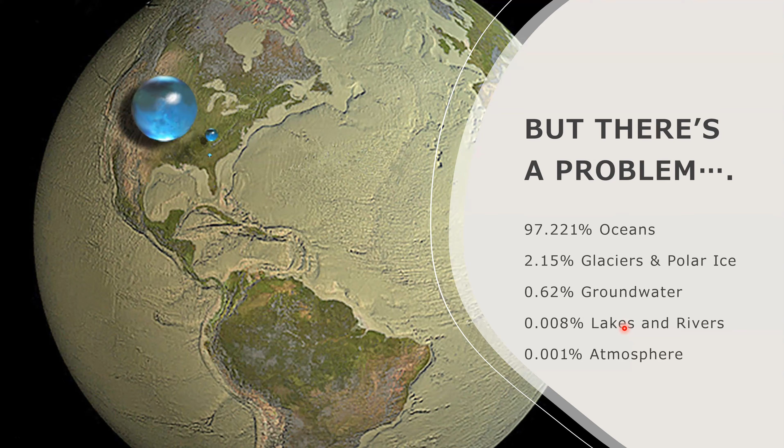So that 1% that we can use of surface water and groundwater, we use it for everything: drinking water, agriculture, transportation, steam power, and a lot of other things. So we have 1% of potable water on Earth that we can use.

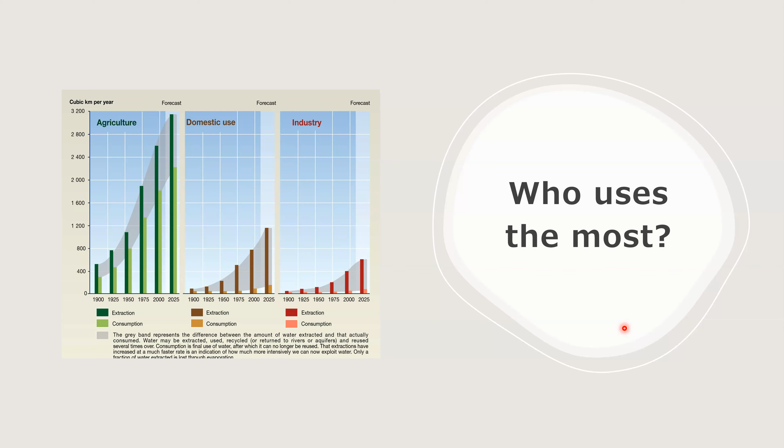So who uses the most? This is a little different than some of the other pollutants we've talked about. When we're talking about petroleum consumption, industry uses a lot more, but as far as water consumption goes, agriculture uses the most, industry uses the least, and domestic household use is right in the middle.

Looking at it a little differently, about 60% of the water usage on Earth is agricultural related, 25% is in the home or domestic use, and 15% is used in industry.

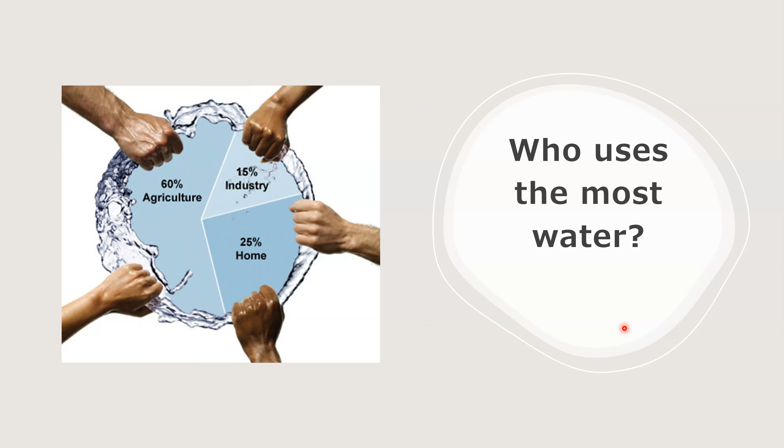Or you can do the meet the parents method, where they only flush it if it's number 2. If it's yellow, let it mellow. If it's brown, flush it down. That helps use less water. It's not super sanitary, but it uses less water.

Baths and showers are about 35% of your consumption in the home. If you take fewer baths or shorter showers, this will decrease for you. Laundry uses about 20%, so filling up your entire drum washer, and then all of that after it finishes washing the clothes will get pushed out into wastewater. Then 10% is drinking and cooking, and 5% cleaning. All of these can change depending on your habits in your home, but this is typical.

You are lucky though, because you can turn on your faucet in your home and clean water will come out. But a lot of people in a lot of parts of the world lack access to potable water. Potable water is water that is drinkable without having to change it at all.

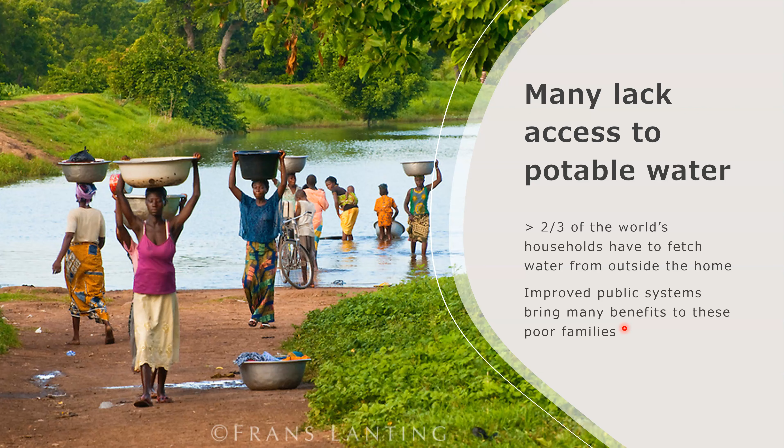So 2/3 of the world's households have to fetch water from outside the home, walking to a stream to get water. Improved public systems bring many benefits to these poor families, and there has been an increase in potable water access in some of these countries, but it's still not as great as if you live in California and can turn on the faucet and get clean drinking water.

This is similar to what's happening in Kazakhstan and Uzbekistan. This is the Aral Sea from 1977 to 2010. From 1977 to 2010, there has been a drastic depletion of this surface water body.

One of the things you'll notice is as more water is pulled out, you'll see these white areas develop. That is all of the excess salt left behind after water is extracted, and we call these evaporites - the product of the evaporation process, what's left behind. It's usually a very high salt content, and eventually this will be undrinkable because there's too much salt in whatever's there now.

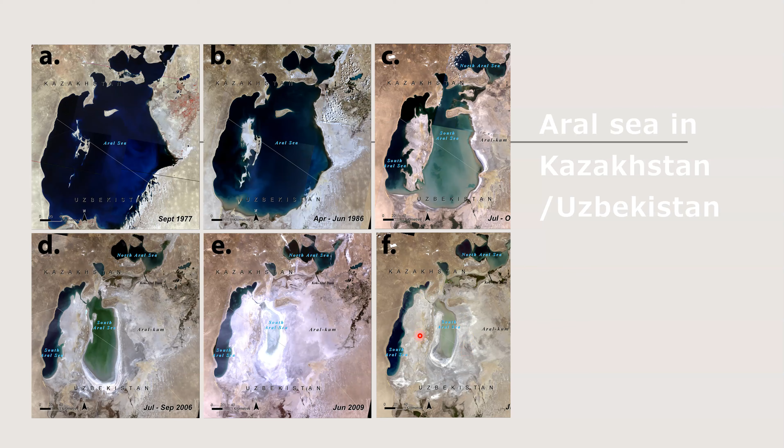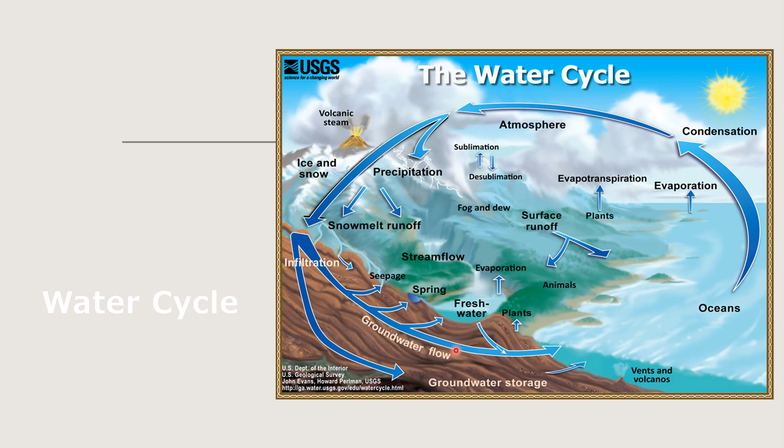The water cycle is important. We need it to live. One issue is that water can get trapped in specific areas. Right now we have a lot of water trapped in the ocean, and without evaporation of the ocean surface, we won't get condensation and then precipitation, which is where we can get water. We can get water from runoff into our surface waters, or infiltration into groundwater, which we can then extract. But if that flows back into the ocean, we won't necessarily be able to use it.

Surface water is any water that is precipitated onto the ground and is not absorbed into the ground, and will run off as fresh water storage. So surface water is water on the surface, like streams, rivers, lakes, things like that. And we can drink from these water sources.

But oftentimes we have to clean them. We have things like surface water treatment plants that help clean out any pollutants that might be in the water before we send them to the distribution system to come into your sink.

Surface water, infiltration, and runoff: when precipitation occurs, the water will either infiltrate or run off. If it runs off, it becomes part of the surface water system, as a stream, a river, or something like that, and then can flow into the ocean. Or it can infiltrate or percolate into the ground and become groundwater, which usually stays in the ground for a significant amount of time before it's pumped out and used.

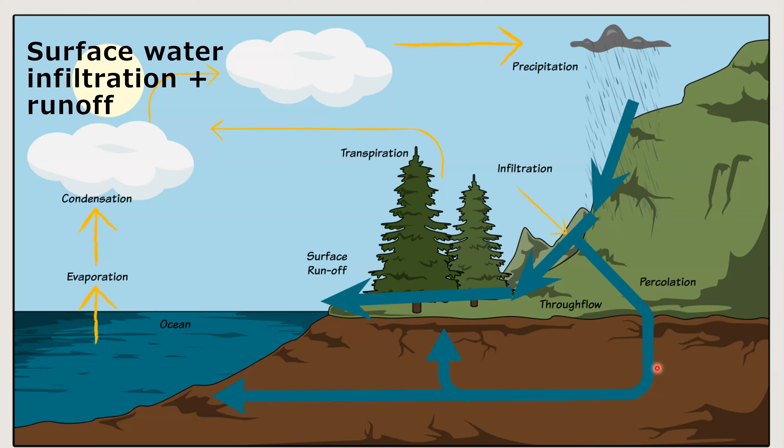Water runoff includes rivers, lakes, small streams and creeks, storm drainage, flooding. Urban surface water runoff happens when it hits the street, then goes into our storm drains, and in the Central Valley in particular, into our flood basins. You've probably noticed big basins that hold water around town. Those are fed by the storm drains you see on the side of sidewalks and streets that collect any rainwater.

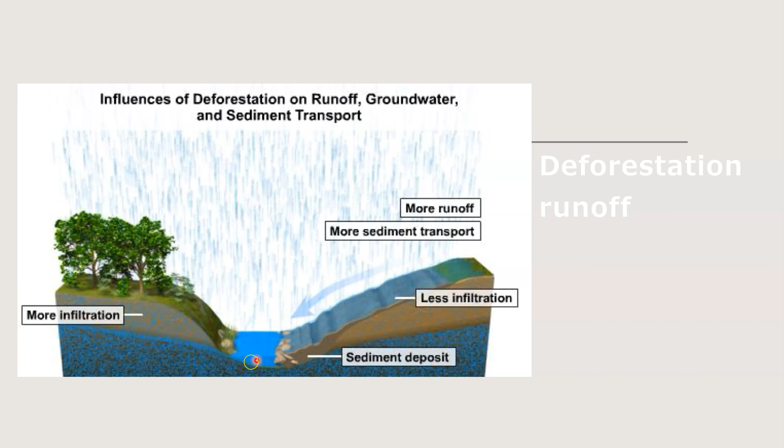Deforestation increases runoff and decreases infiltration. The more plants and trees you have, the better your infiltration will be into the groundwater, and that's really where you want most of your water to go, because the ground has a great natural filtration system built in. Whereas as soon as water hits the ground, if it starts running off, it has more chance to pick up ground pollutants on its way. So the more deforestation in an area, the less infiltration and more surface water runoff you'll see, which will also increase surface water pollution.

Things that influence water infiltration are precipitation, the base flow you already have on the surface, soil characteristics, soil saturation—if the ground is already saturated, more water can't fit in—land cover, such as whether you have deforested lands or large vegetation in the area, the slope, since the steeper the slope, the more likely water is to run off instead of percolate or infiltrate, and the evapotranspiration.

Water infiltration can be affected by porosity and permeability. The subsurface materials below the surface will either have a high porosity or a low porosity. Porosity is the volume of open spaces in a rock or soil. If we have a high porosity, water can fit into the pore spaces between the grains or between the rock or soil very well. This can be pore spaces, fractures or joints, vesicles, cavities—any opening in the rock or soil is considered porosity. Permeability is a measure of the material's ability to transmit that water.

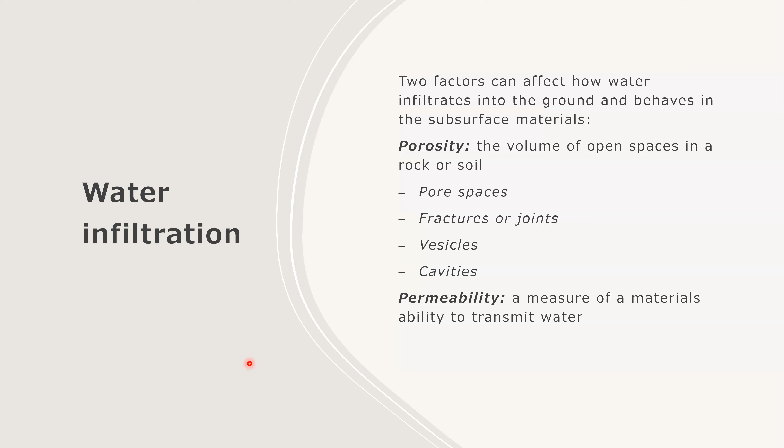If it has a high porosity, it'll often have a high permeability, so these go hand in hand. Permeability is the ability to transport water, and porosity is the open spaces. We want the subsurface to have a high permeability so that water can infiltrate. Things that have a low permeability will not allow water to come in.

So here's an example of what permeability would look like in different types of materials. Here we have gravel, sand, silt, and clay. Clay is a very small sediment size, and it will take upwards of 200 years for the same amount of water to flow through the same amount of material versus gravel, which would take 2 minutes. So depending on the subsurface material, if you have a lot of clay, you'll see water pool at the surface more so than infiltrate.

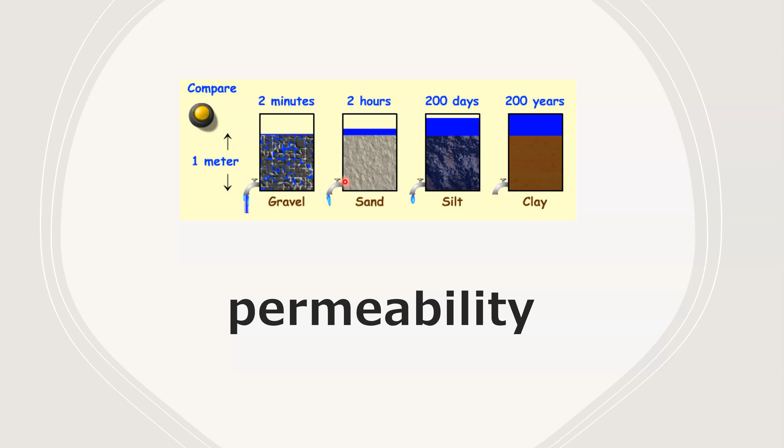So in places like Tulare, that used to be a giant lake basin which had a lot of clay. There's still a lot of clay in Tulare, and they have poor infiltration into their ground. When we have surface water, you see a lot more pooling out there. Whereas in Reedley, they have a lot more sand and gravels because they're near Kings River and near the mountains. So their infiltration is greater in Reedley than you would see in Tulare.

So here's a look at porosity. Porosity, like I said, is the pore space between the grains. Depending on whether you have all of the same size, different sizes, or maybe some cement holding some of the grains together, that will increase or decrease the porosity. So if you have a bunch of marbles in a jar, for instance, the porosity would be higher than if you had those same marbles plus sand in the jar.

So some porosity factors are rounding, sorting, and cementation. Rounding is how round the grains are. If the grains are very well rounded, you're going to fit more water in those pore spaces, you're going to have more pore spaces, higher porosity. If it's poorly rounded, so it's angular, the grains will fit together more like a puzzle piece, and then the water, as it infiltrates into the ground, doesn't have as many spaces to fill.

So it would be a lower porosity if they are poorly rounded. Now, sorting is the sizes that I was talking about. If you have all marbles, there's a lot more spaces between the grains because they don't fit together like a puzzle piece. But if you have two different sizes, marbles and sand, the sand will fit between the pore spaces in the marble, and then less water can fit in. So if you have poorly sorted material, a bunch of different sizes of grains, you're going to see less porosity, a lower porosity material. If they're well sorted, all about the same size, you're going to see a higher porosity.

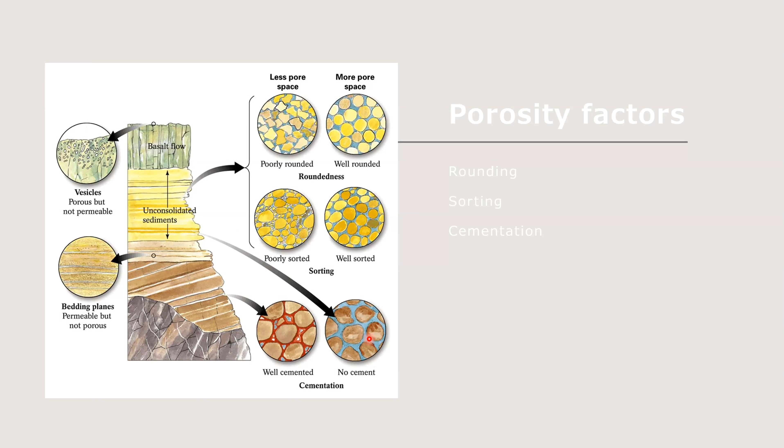All right, so this is an example of permeable pavement. One of the issues in urban surface water runoff is that a lot of the surfaces that we create are not permeable. So asphalt, concrete, these things do not allow water to permeate through them and then go into the ground below them. So there's something called permeable pavement that has been developed.

And you see this a lot in San Diego. You'll see it in some parts of LA. They have it in Santa Barbara. Sacramento's starting to do it, so that the water percolates through this pavement and doesn't get stuck on the surface and clog up our drains. So the speed test is pretty interesting to watch. Hopefully it'll work.

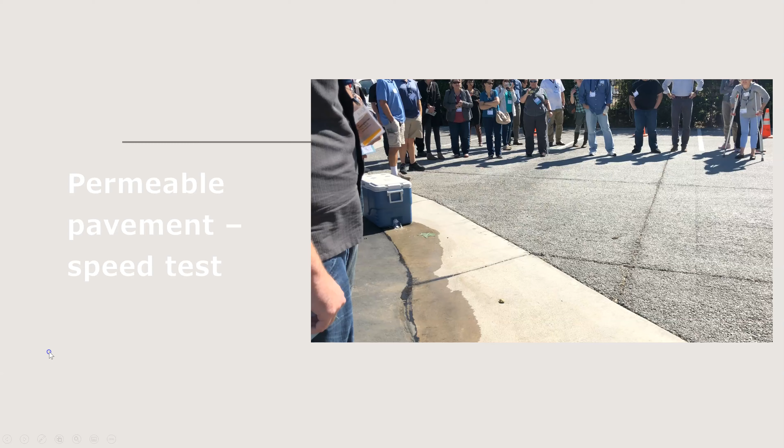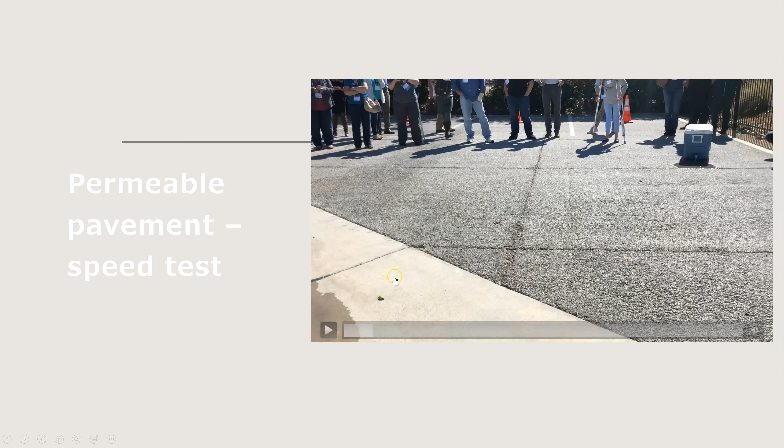There we go. Okay, so one second real quick. This ice chest is filled with water, and this ice chest is filled with water. One is on the drain, which is impermeable concrete. This one on the right here is on the permeable pavement.

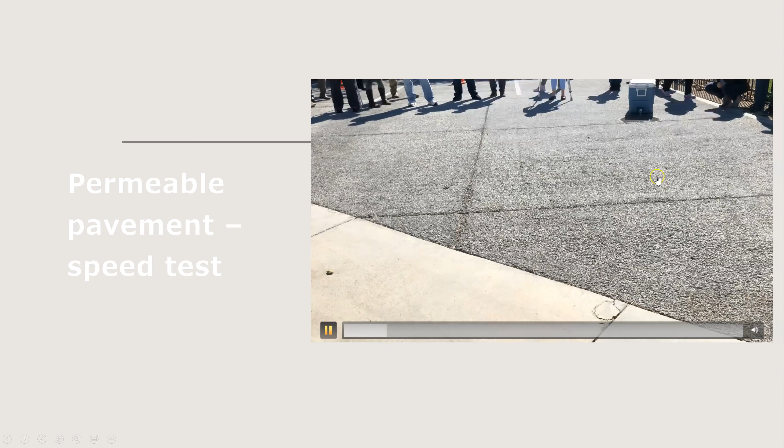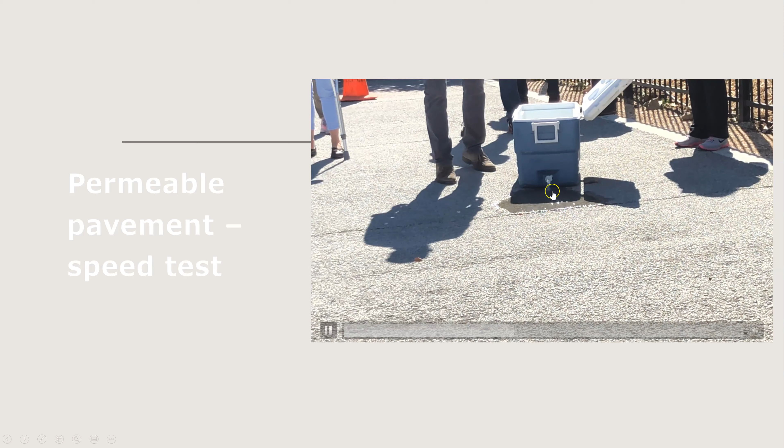Okay, and you can kind of see what's happening. So water is flowing down this impermeable concrete, and the water is flowing into the permeable pavement. The water here is allowed to percolate into the ground beneath the pavement, whereas this other one here just flows into the storm drain and is now backing up the storm drain here, as you can see.

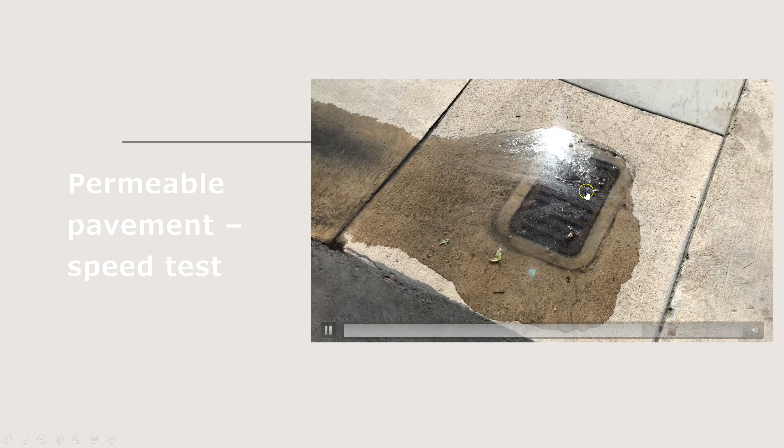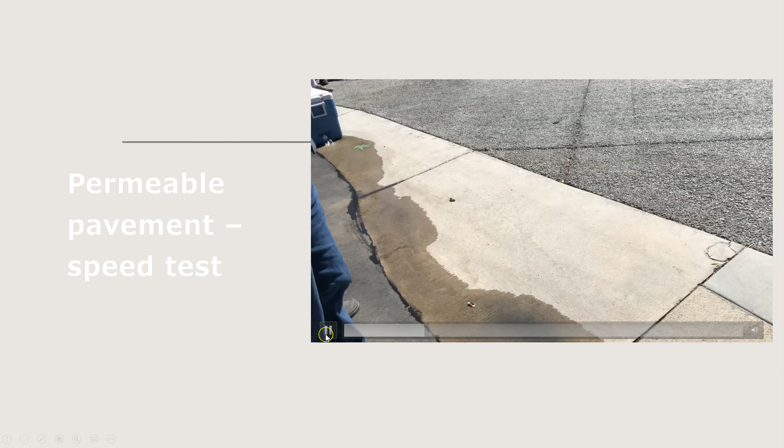And so this causes a lot more issues with runoff, right? So if we have more permeable pavement like this, then we would see more infiltration into the ground in urban areas. Here's another look at it. This is in a parking lot.

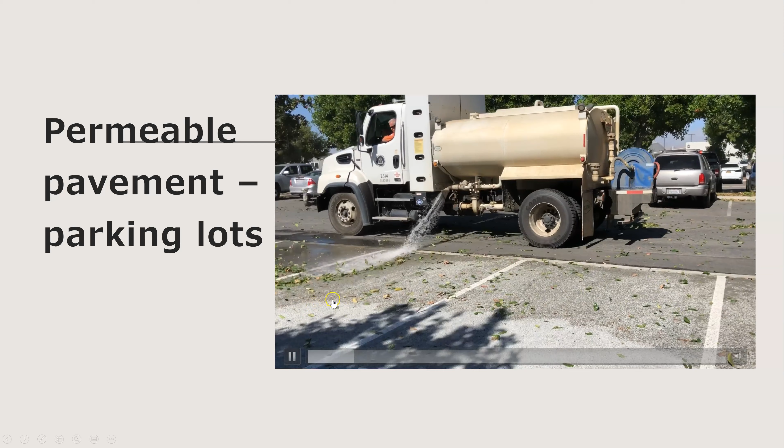Water starts spraying a significant amount onto the ground, and it's not even coming up halfway into the driveway space. So the water is percolating really well into the pavement and then going into the ground.

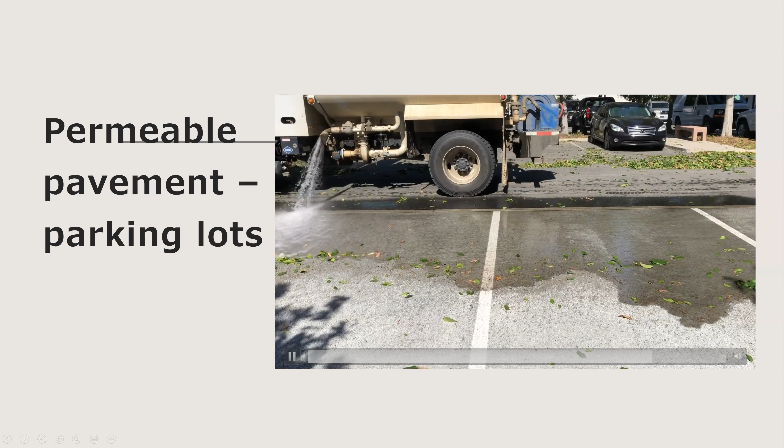Now, one of the issues when we were talking to the people who developed it, on this little field trip, is that these holes will get filled with dirt, debris, and leaves. So they do have to do more maintenance, cleaning it out and sucking out the dirty stuff so the water can still percolate through. But this is a really good development.

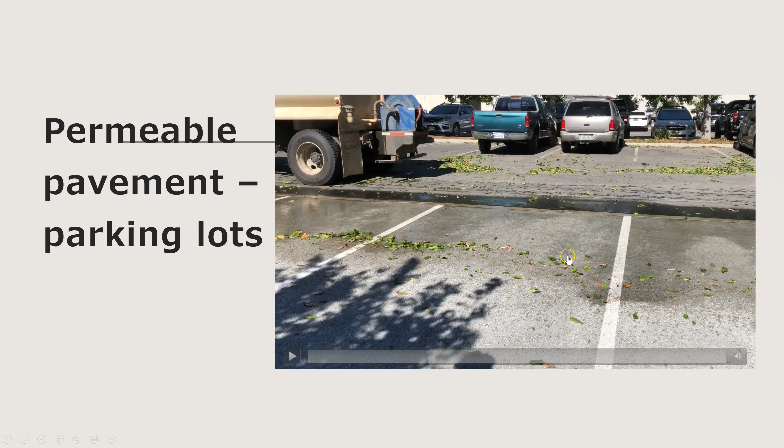Instead of water running off, it can now percolate into the ground. You'll see less surface water storage, but you will see an increase in our groundwater levels.

All right, so let's look at groundwater. This is what happens when the water hits the surface and percolates into the ground. We then focus on groundwater, which is really important when we're talking about drinking water and how water works in the Central Valley.

So after infiltration occurs, there are a few different zones that the water can sit in. The first zone it would encounter is the zone of aeration, the area above the water table where openings in the material are filled with air and water. This is where water is transported from the surface all the way down into the groundwater.

The capillary fringe is a narrow zone just above the water table where water is pulled upward. Just like anything in nature, water wants to go from an area of high pressure to lower pressure. As it approaches the groundwater from gravity pulling it down, the water tries to go the other way, climbing back upward in this narrow zone, but eventually gravity is stronger than that threshold and pulls it back down to the water table.

The water table marks the top of the saturated zone, the bottommost zone in groundwater, known as the zone of saturation. This is a zone where all openings between spaces and grains are filled with water. Any pore space you see between grains is filled with water.

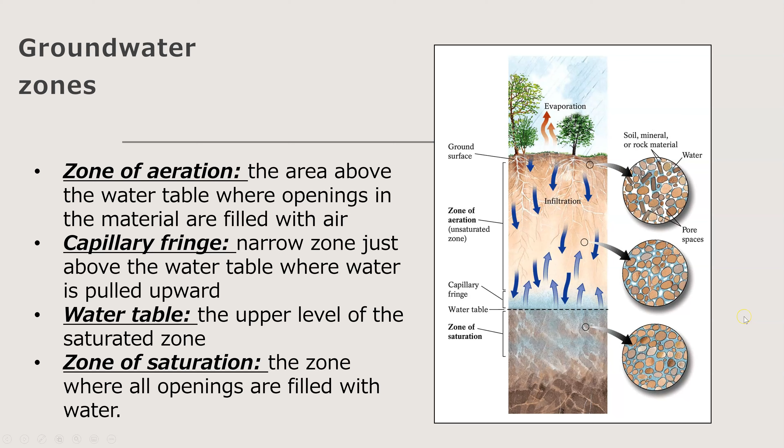The water that reaches the groundwater can be stored for hundreds of years in aquifers if it's not pumped out by people. An aquifer is a permeable rock or sediment that transmits water in a quantity great enough to be of use. So just a 5-gallon section of water is not considered an aquifer—it has to be over a vast area.

In Fresno, we have something called the Fresno Aquifer, which sits below the area of Fresno. So we have confined aquifers, unconfined aquifers, and then flow between aquifers.

Confined aquifers are overlain by a confining layer, an impermeable layer. Here we have a confined aquifer at the bottom, and a confining layer preventing flow between this confined aquifer and the unconfined aquifer above. Then we have the unconfined aquifer, where the water table is the top.

These upside down triangles represent the symbol of the water table, just an FYI. So the water table is here, where this blue line interacts with the yellow—this is the unconfined aquifer, where water will percolate down and become part of the aquifer.

Aquitards will retard flow between two aquifers, and aquicludes will exclude flow between aquifers. So this confining layer could either be an aquitard or an aquiclude, depending on its permeability properties. If it has intermediate permeability, it might just be an aquitard, slowing the flow. If it's more like clay, it's considered an aquiclude, which excludes flow between aquifers.

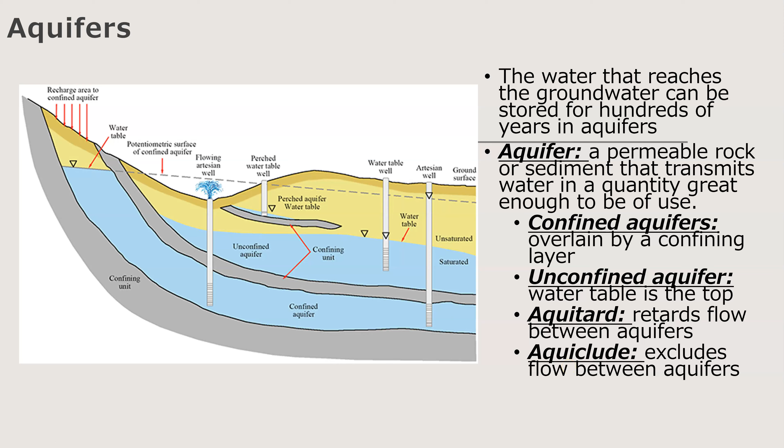When we talk about groundwater interactions, there's something on the coast of California that happens a lot: saltwater intrusion. This is when pumping of fresh water out of a well exceeds the recharge rate—you're pumping faster than the water can be replenished. This happens in a lot of coastal areas, and saltwater or seawater will infiltrate into your well. As soon as you see saltwater intrusion into your well, you've lost that well.

You then have to re-drill the well with more fresh water and try to create a barrier to prevent more salt water from coming into your new well, because you can't drink salt water.

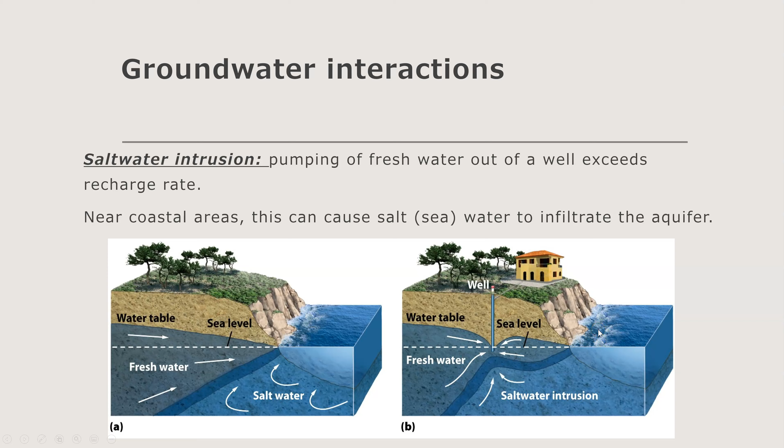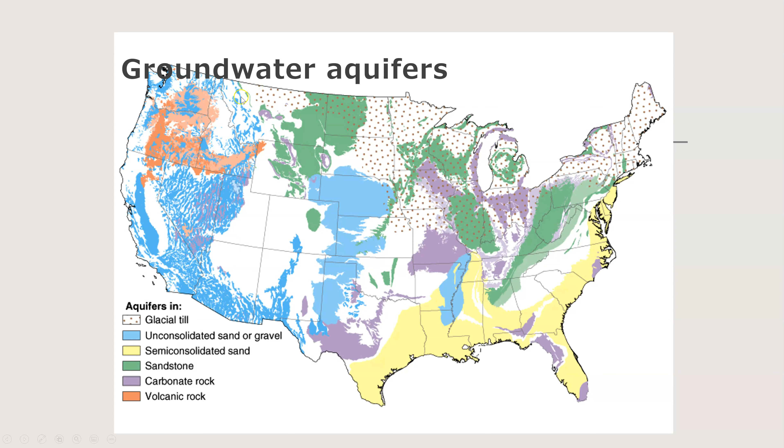A lot of people don't actually know how you get water into your home. There isn't a pump unless it is necessary. Most of the time it relies on pressure. At a particular water level, there is a pressure surface, which is the water level, and if that pressure surface is above where you want the water to go, it will help push the water into those other areas. Water tanks in neighborhoods are a good example of this, very obvious at Fresno State.

If you ever drive through there, they have a very large water tank. That water tank is tall, so that it's taller than the buildings, and the water level is higher than where you would want water to go into buildings. The pressure helps push it down into all of these pipes and then into the buildings or into your homes. That's how we get water into our houses.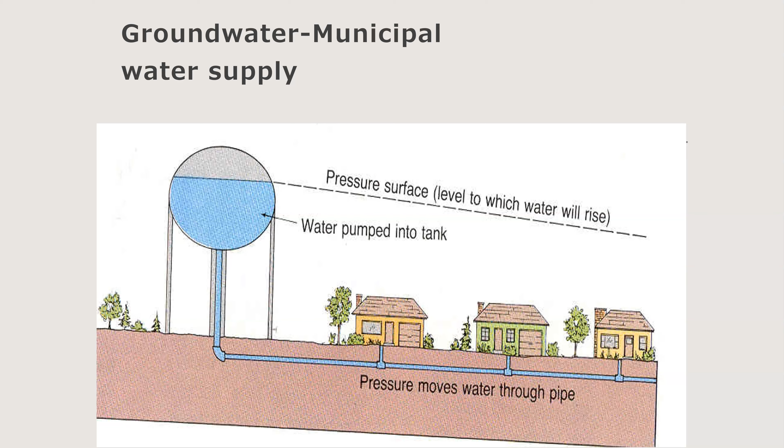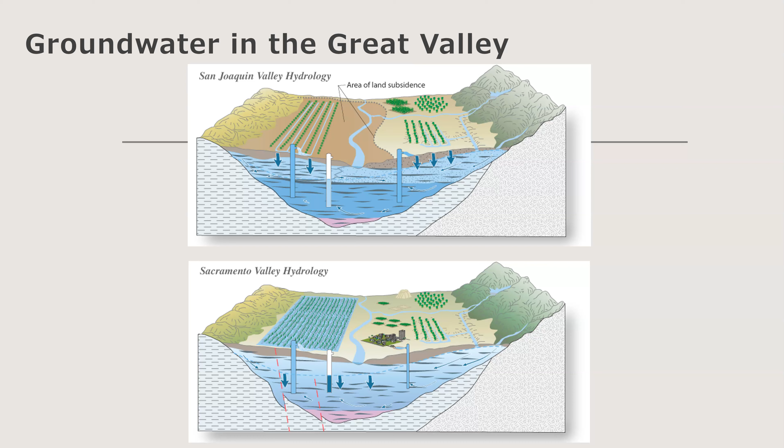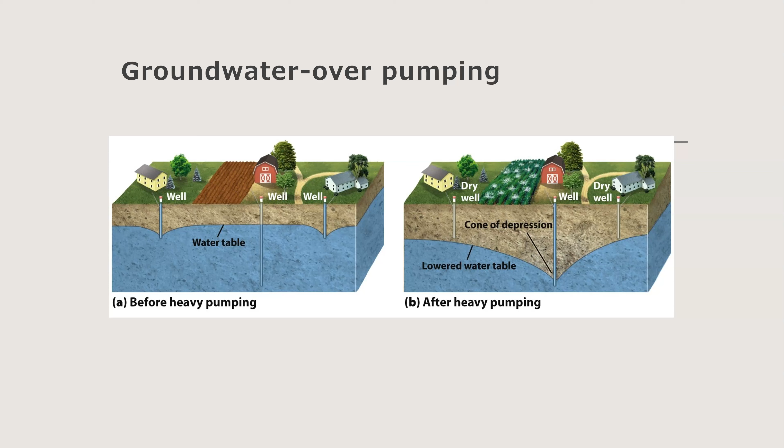Overpumping causes that subsidence I was talking about. Basically what happens is groundwater is removed, and groundwater takes up space in the subsurface. As groundwater is removed, that space can collapse or consolidate on itself, and the weight of the material above helps push that down.

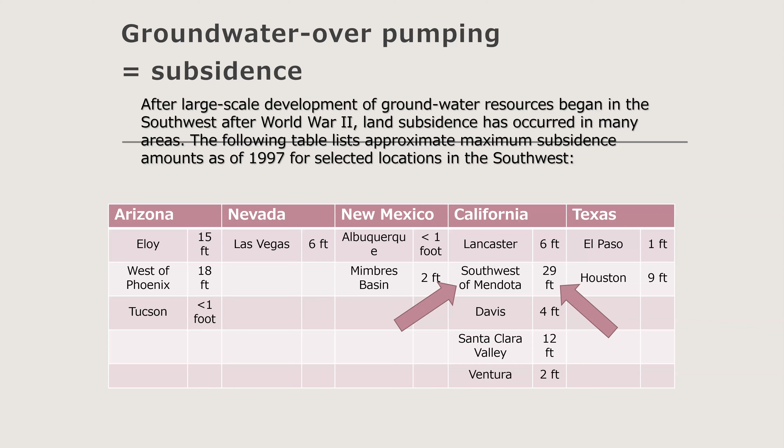You remove groundwater, and this doesn't happen overnight. If the groundwater was replenished at a steady rate, that water would fill in those spaces where we just removed water. But that doesn't appear to be happening, and we see subsidence of the land - we are losing elevation. This happens the largest in southwest Mendota. We've lost 29 feet since World War II. The land has decreased, the elevation has settled 29 feet. That's significant, and here's an example of what that looks like.

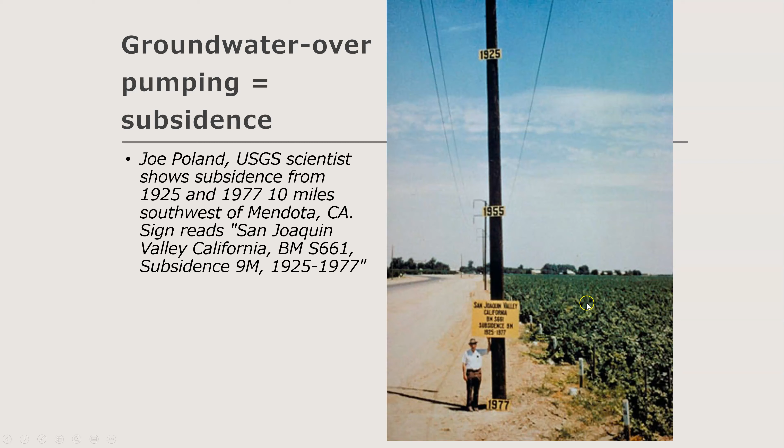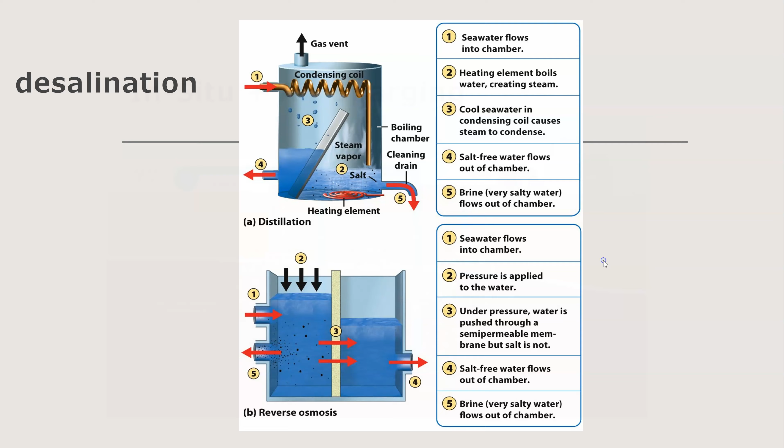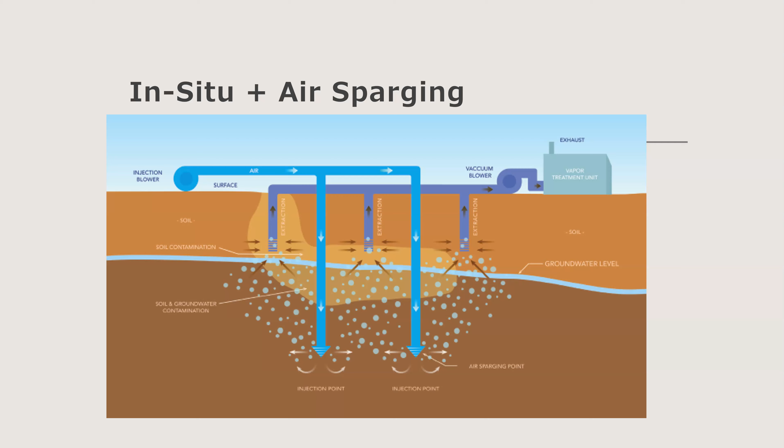Other things that can contaminate groundwater are gasoline and diesel. At gas stations, if the tanks leak, that gasoline or diesel can get into the soil and then into the groundwater. The way you get cleaner water from those areas is through air sparging, where we inject bubbles or air into the ground, which the gas will bond with and come up through extraction units. It can then be cleaned as a vapor, resulting in cleaner exhaust, while we discard the contaminants. Basically, this adds air into the ground to extract the bubbles that contain the petroleum product.

So this is what happens in a lot of Fresno before you see any water come into the pipes. We have a lot of treatment on our water to help remove a lot of these chemicals that have contaminated our groundwater or continue to contaminate our surface water.